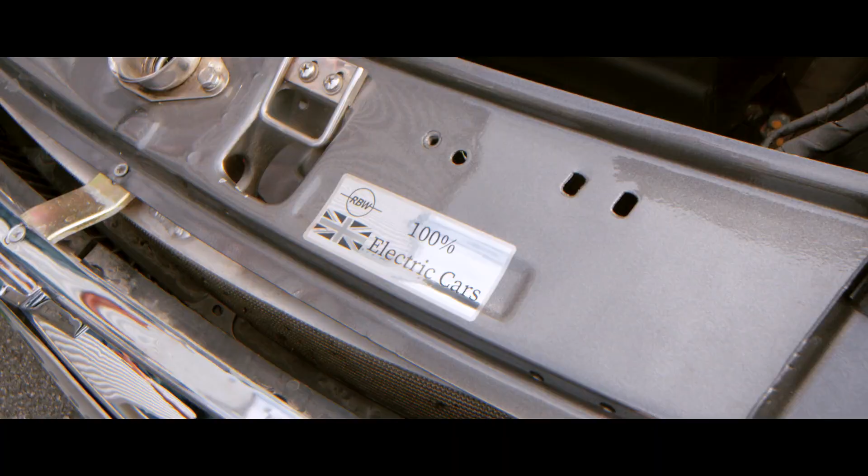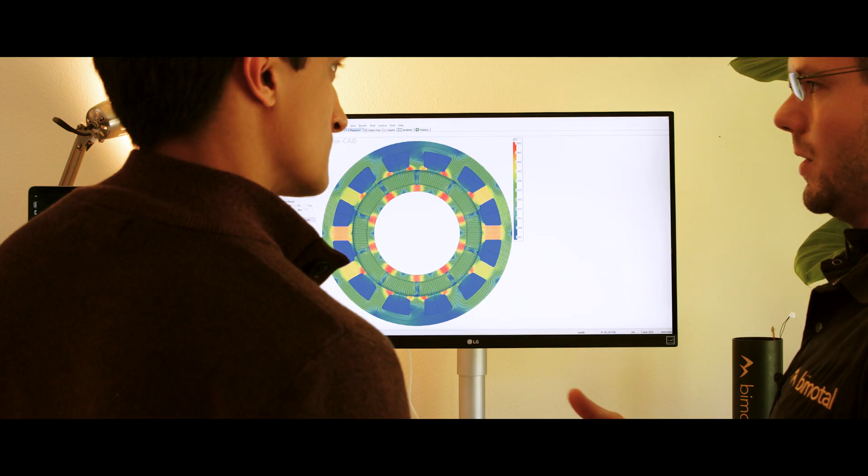Today, we're going to go beyond electric cars and public transportation and see some of the groundbreaking new technologies you may not have heard of. We'll visit the world's brightest scientists, engineers, and inventors and see their bold new ideas for technologies that help rescue the planet. And we'll learn how they're using cutting-edge simulation software, like the kind developed by Ansys, to speed up development, reduce costs, and make sure we get these vital transportation solutions as fast and efficiently as possible.

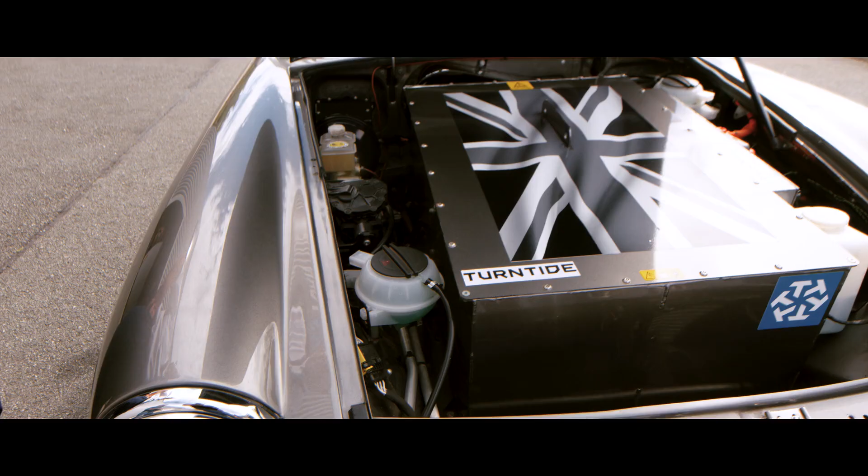When it comes to electric cars, we've come a long way, literally miles. But the fact is, transportation remains responsible for nearly a quarter of global emissions, and personal vehicles are just one contributing factor.

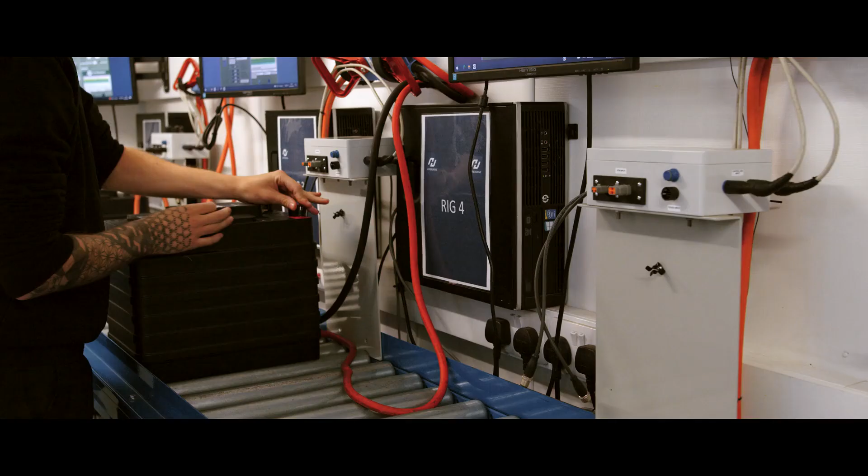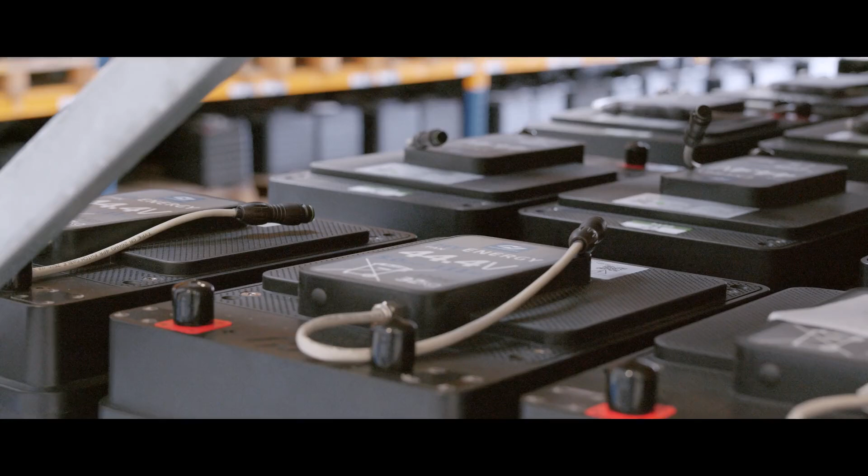Heavy machinery and rail, for example, still largely rely on internal combustion engines to operate. Turntide is looking to change that. With a diversified portfolio of solutions in electrification, energy storage, and electronics, Turntide seeks to expand the decarbonization of transportation beyond the humble car and accelerate the world's transition from fossil fuels.

Batteries are living things, so when we look inside this and there's a cell, it's a chemistry. Chris Pennison has developed a reputation for delivering high-performance manufacturing. His mastery over processes has put Turntide in a position to deliver industry-leading electrification solutions that are both environmentally and economically sound.

So I think when most people think about electric vehicles, their first thought might be a Tesla or a Nissan Leaf—a car, right? Yeah. But you're not doing that, are you? You're looking more broadly. Could you tell me about that? Absolutely. What we're really interested in is what we call the long tail of electrification—everything else that we know will need to be electrified, from construction vehicles, agriculture, autonomous guided vehicles, marine, aerospace—everywhere that needs to be electrified but maybe isn't as advanced on the journey as the OEMs and the passenger car market, which is really our target.

Okay, so say I was a customer and I had, I don't know, a construction vehicle. What would be the process of me talking to you and saying, hey, I want this electrified? What would you have to consider, and what are the challenges involved in that? What we have to understand is what the capacity and the working requirements that we can offer you are.

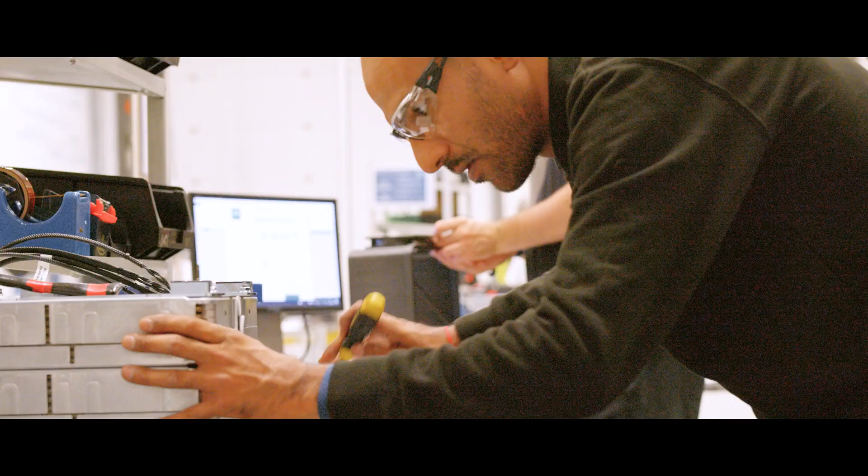We can then do some of the design work, to see if actually what we think will work. We then step that through with the team we've got here to take the simulation data—we'll model it, then we'll hard model it. So it goes all the way through to when it ends up like this and goes to the customer, it's gone through various iterations to get to the customer, to give you, if you're the customer, that confidence that it's going to actually do what it says it will do on the tin. This is a bespoke designed cooling radiator.

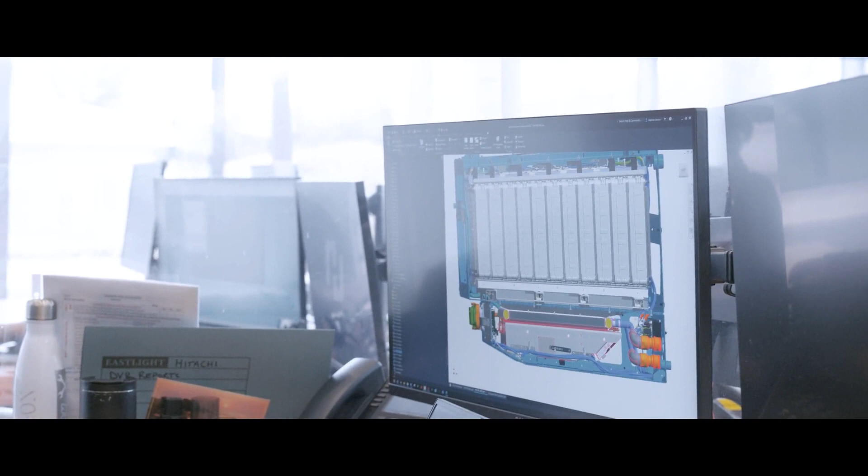What sort of temperature range did you have to keep them within? We're trying to target 25 degrees Celsius, purely just to make sure that the cells don't degrade.

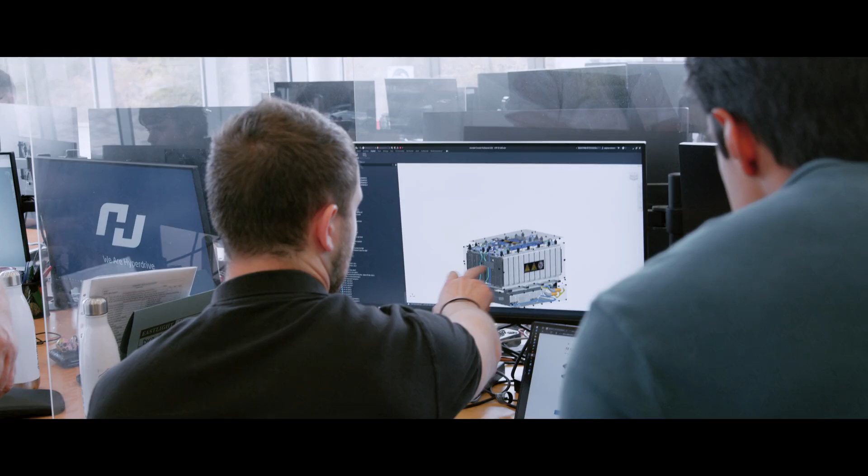Basically what we've got inside here, these are the battery cells. We've got 22 of them that fit in basically 2 stacks. We've got our own PCB design, which is the battery management system.

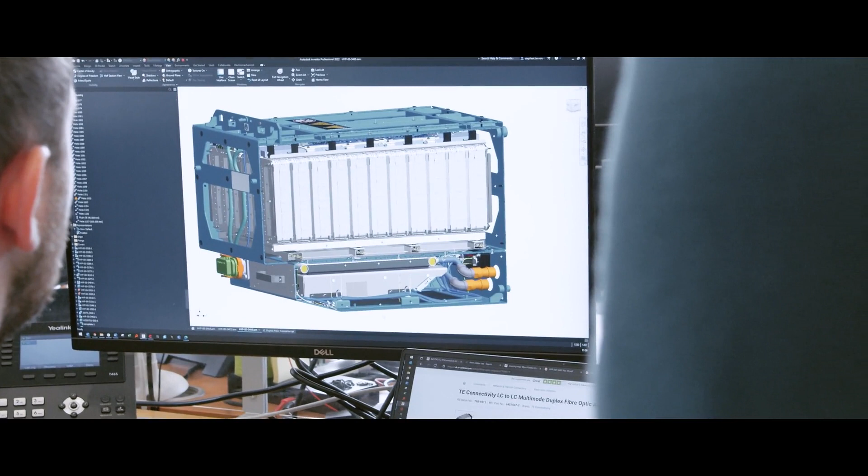Rather than building everything, we run the simulation to make sure we can still get everything we're trying to do in that same envelope with the weight we're allowed, before we actually start to physically cut steel to a point. And what you've got here is the battery pack.

If you remember what he was showing you, the modules - so this is in effect the fuel tank. This is the cell modules, the cooling system at the bottom here, and then what you've got on the top is the brain and the battery management system.

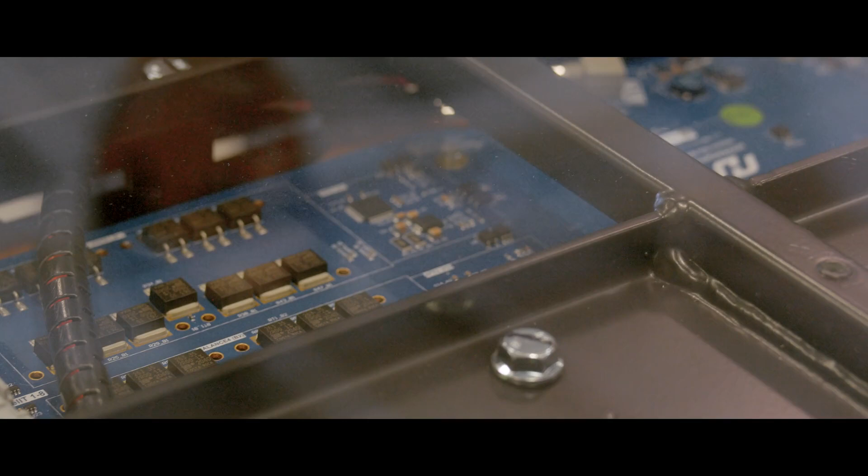This is the output of, in effect, 2 years of work to get to this stage. It's already been simulated for life. You asked me about safety - we've already done fire testing on these to make sure it reaches all of the correct accreditation.

We're now at a point where these are in test vehicles, because now you've got to build miles up, and there's a year of testing on that before you even get to the production bit.

This is the last part. If you think about it, we've had raw material come in, we've built it, we've followed the process, we've charged, we've discharged, we know it's all good. Then all the customers need to have, depending on who they are, their language put on their software, and that's what we do here.

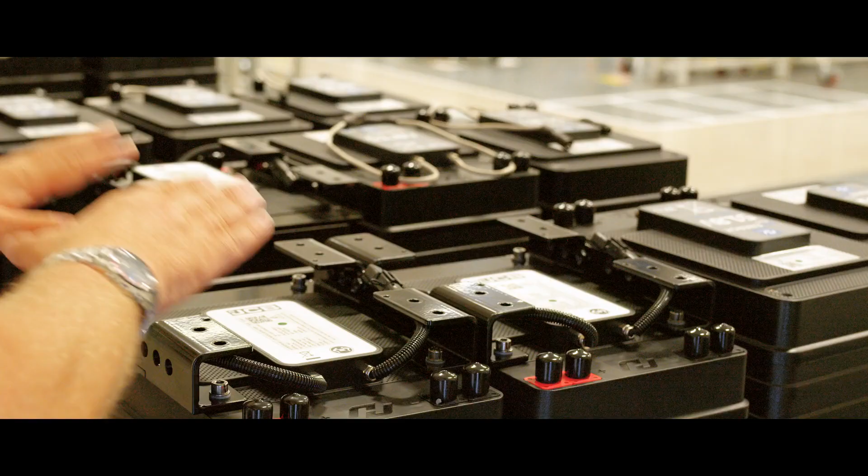So this then really brings them to life, this really allows customers to do - to your question, what will I do with this when you send this to me? Well, once I've put the language on, once we've done all of our checks, you will be able to install it into your vehicle or whatever process you're using to allow it to work.

So this is where it all ends up. After everything we've seen, this is the niche end of the market - batteries that we've developed then go into this vehicle.

Awesome, so what happens, seeing as we're at the end, what happens to those batteries once you've used them? Okay, so we're not quite at the end. So we get a life out of the batteries that are in this vehicle or our other vehicles, and we call it end of first life.

So then we take the batteries back. We then have a secondary use for them, stationary energy storage, or we move them to another application. We put new batteries in here, the vehicle's as it was, and it'll run as normal, and then we continue to use the batteries. So yeah, show me what this car does.

Okay, so we're ready to go? Absolutely. It's so quiet, this is quiet. Yeah, and now we're ready to go. It is incredibly quiet actually. I was expecting it to be. I'm going to give you a little squirt along here now. Oh ready? Yes, let's do it. Let's go.

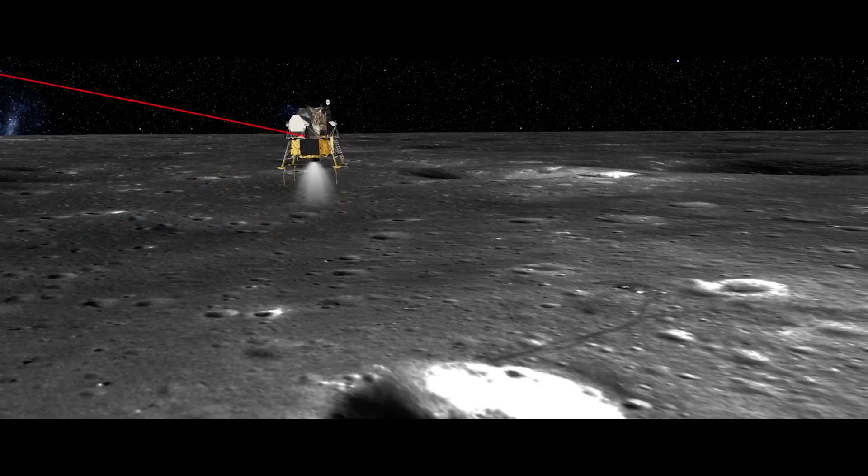In 1903, Wilbur and Orville Wright changed the world forever with a 12-second powered flight at Kitty Hawk. Just 66 years later, a man walked on the moon. Looking back at that history, our pursuit of aviation has been nothing short of incredible. But now we know that it comes with a cost. The fact is, air travel alone pumps over 1 billion tons of greenhouse gases into the atmosphere every single year. And as the world heats up in response, we need a solution now more than ever. So how do we decarbonize our aircraft?

MagniX is exploring how electrification can be applied to aviation, presenting a proven capacity to power a diverse range of aircraft and driving the world's transition towards electric flight.

An author and inventor with 5 patents to her name, Sarah Rogier has worked extensively on the development of electrical machine technologies for aircraft. Here at MagniX, she leads electric propulsion system development, focusing on the design and delivery of electric power units for carbon-free flight.

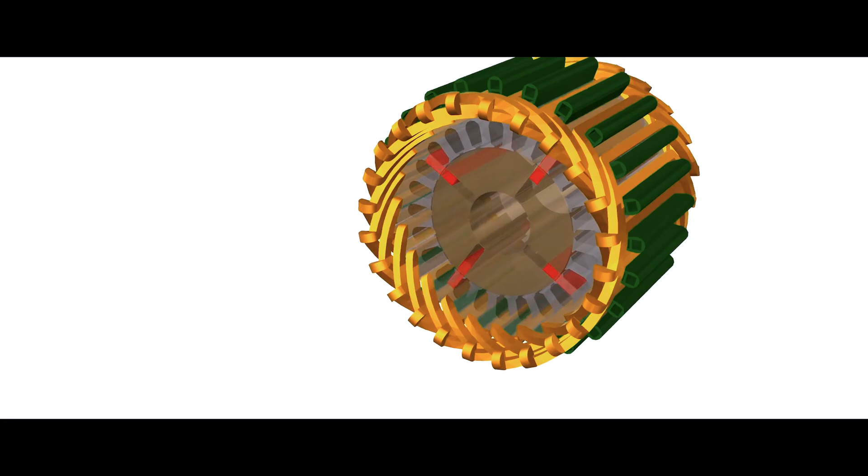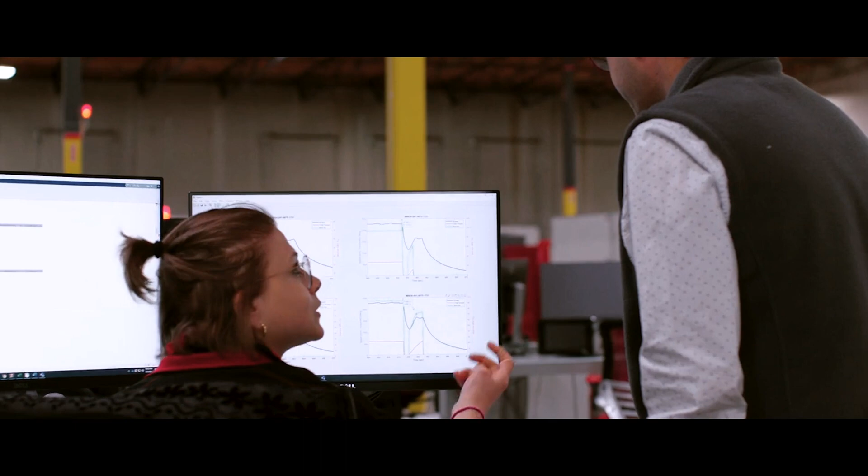For example, when we design the motor and the entire EPU, we have to start from finite element simulation to predict the electromagnetic behavior of the motor, then move to thermal simulation to see how we can extract the heat from the losses produced by the motor. Then we integrate the rest, for example the control, which is part of the inverter behavior. We simulate everything at system level.

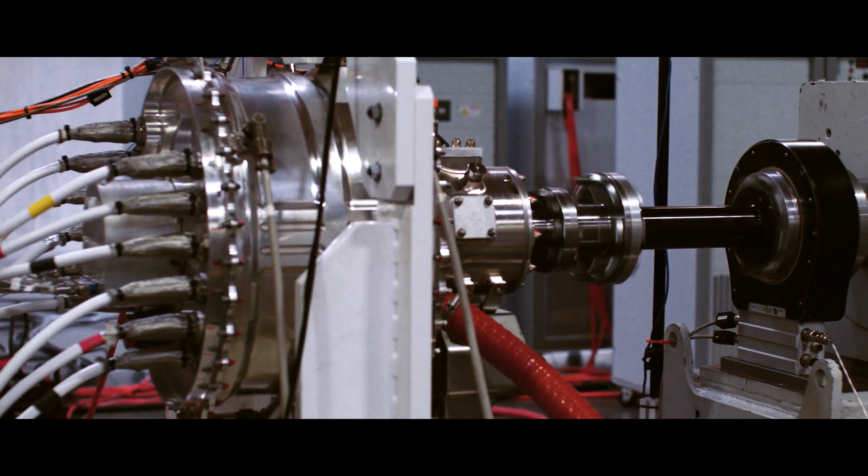Then we move to hardware in the loop, where we simulate part of the system and the rest is hardware. Finally, we move to the complete integration of the EPU with the final propeller configuration we're going to have on the aircraft. There's no more calculation by hand you can do - we need finite element simulation even for the mechanical part, to simulate the stress around the motor and the mounting parts. Everything is basically done by simulation. We cannot fail this.

Obviously this is having a massive impact on emission reductions, or has the potential to. Are there any benefits beyond the environmental? Mainly costs - a ticket, instead of costing $500, will cost an estimated $50. And also noise: you can have aircraft close to your hometown without the huge noise you get from a fuel engine. The electric airplane will be much quieter than that.

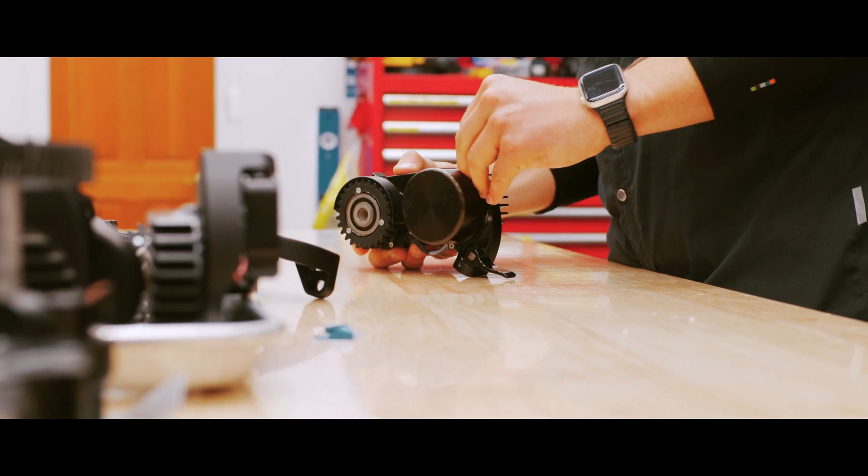Reliable and eco-friendly, the bicycle has been around for quite some time. But what if you've suffered an injury, live next to a really steep hill, or have a longer commute? Over the past decade, we've seen these once impossible uphill climbs conquered by the e-bike - a bicycle supported by an electric powertrain. But how do we make this tech lightweight, powerful, versatile, and accessible to everyone? That's just what Bimotal is doing.

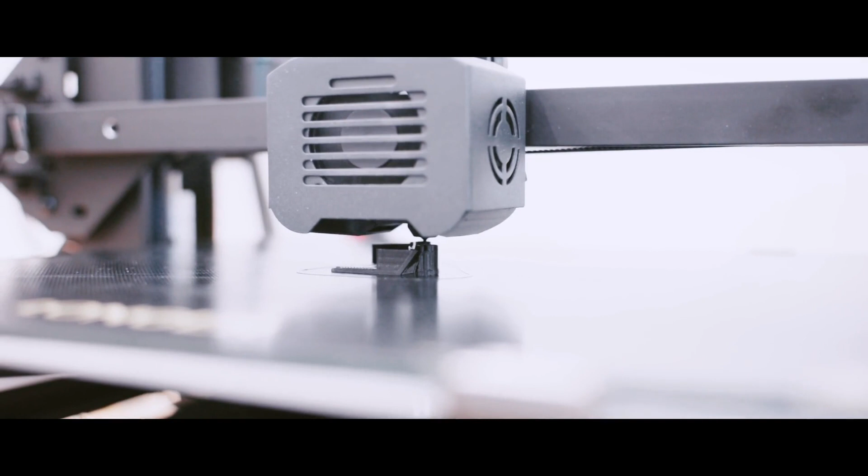Basically the genesis for this idea was actually an accident. I had a ski injury, and that led to me not being able to ride the bike trails I loved riding. Growing up in the tech-rich culture of Silicon Valley, it's hardly surprising that tinkering with electronic devices became an early hobby for Toby Rico. Working on EVs by day, Toby Rico spent his evenings and weekends researching to find the most efficient combination of power, weight, and versatility in an electric assist system for bicycles.

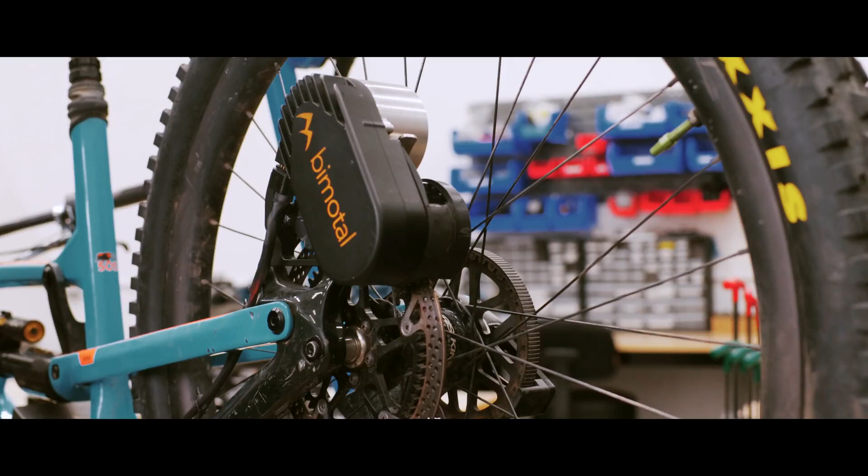The result of hours of research and entrepreneurial spirit is right here: Bimotal. I started staring at my bike literally hours every night after work, and eventually the idea came to me. I was like, wow, you can put a lot of torque through a disc brake. I wonder if you can change the direction and get some propulsion that way.

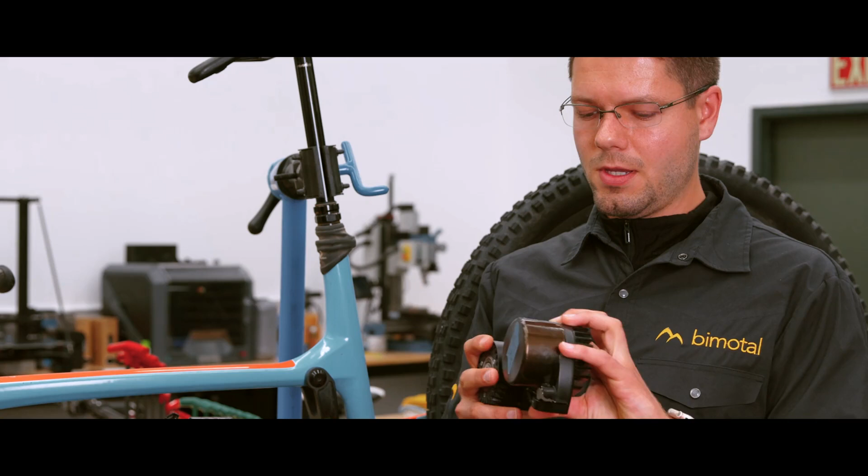You're effectively, as I understand it, creating a device that you can attach to almost any bike and it becomes an electric bike. So how does it work? This is the Bimotal Elevate, and basically the way it works is we have a motor here, and then there's a multi-stage gearbox in here, and that lets us reduce the torque on the motor so we can make the whole thing smaller.

And then we have a proprietary gear here, and this drives torque through the bike's disc brake. And so in order to make a bike electric, we have to swap the disc, add a couple bolt-on mounts over the brake caliper, but basically any brake mount can handle a lot of torque, so it's a great way to make most bikes electric, without any real modifications.

Can I have a look? Absolutely. Yeah, my first impressions are it's much smaller than I was thinking. So is this attached to every bike, or what are the limitations? Right now we're launching it and targeting more mountain bikes because there's a much higher rate of compatibility there. But eventually we're trying to make it compatible with pretty much any bike that has a disc brake, and the general trend of the market is actually moving towards disc brakes.

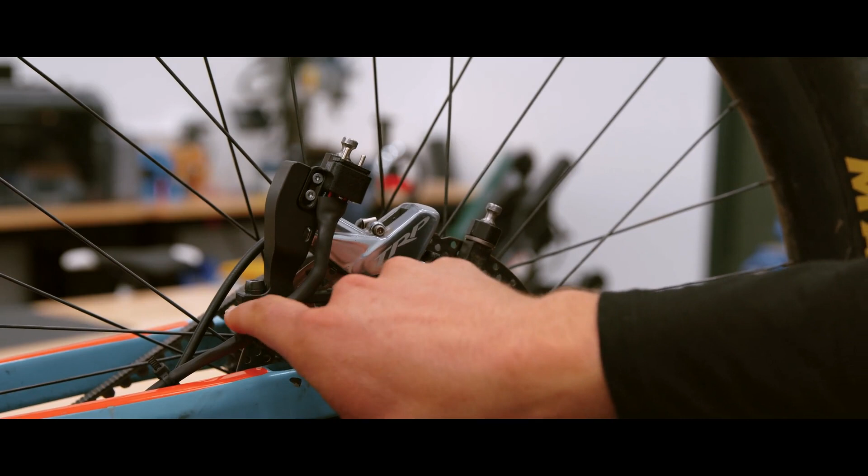So this is a stock brake caliper, this is a sort of stock bike position. This one aluminum piece is designed by Bimotal, and then these quick connects and connector also designed by Bimotal. It's latching onto these two studs here, and then this is the electrical contact custom connector we also designed, and that lets you take it on and off rapidly.

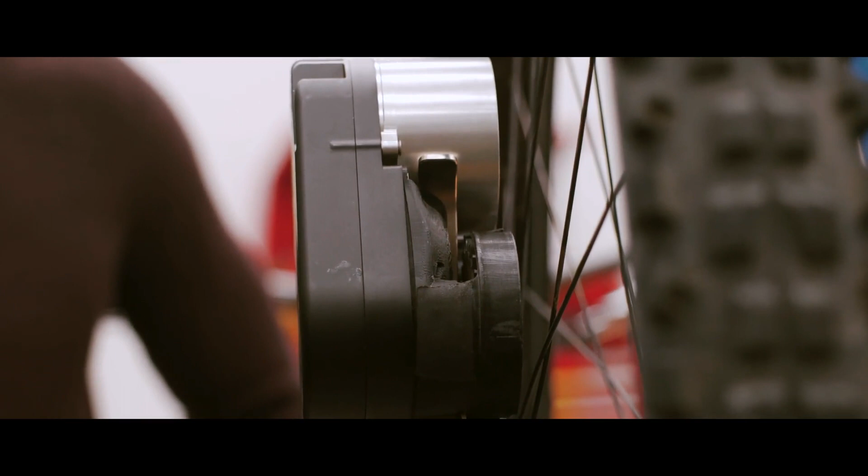That was very quick. So how much power does it generate? The Elevate system can actually do even more than 750 watts. What a lot of people don't know is they think these systems are power limited, but it's actually torque that's the challenge. So providing high torque is something that's difficult to do in a small package.

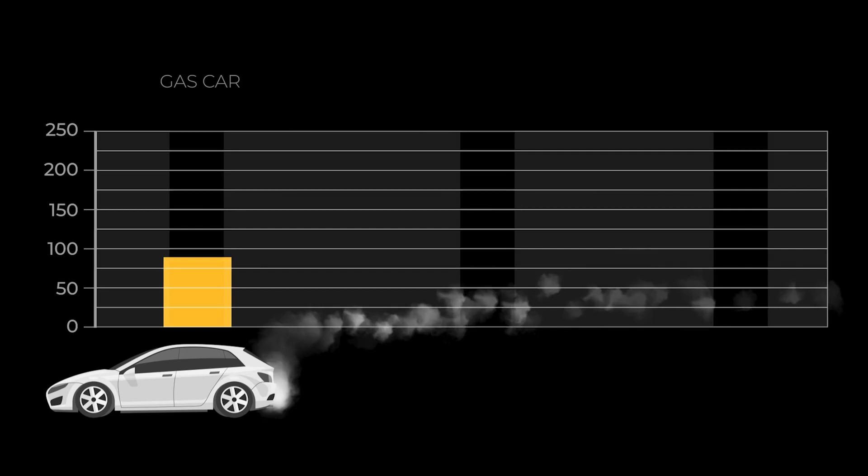So let's talk about the bigger picture here, because obviously driving cars is still kind of the go-to form of transportation, and by and large those cars are producing a lot of CO2. Clearly, if we cycled more, that's got to be part of the solution. If you look at how much CO2 is generated, road transportation is still the single biggest block. The gas car is about 250 grams of CO2 per mile. An electric car is about 50 grams of CO2 per mile. So that's a 5 times reduction.

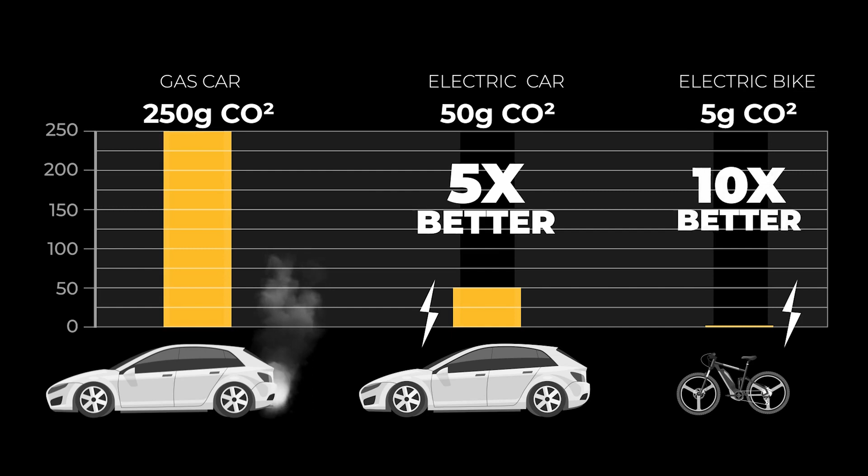You get down to an e-bike, it's about 5 grams, and that's another 10x better than an electric car. Step one is making bikes more fun. So the Elevate system, you get on this thing, it's just a blast. Improving the metrics of the bike system, the range, the weight, reducing cost by making it so you don't have to get a whole new bike, you can add this system. All these things will kind of add up and make bikes a little more approachable.

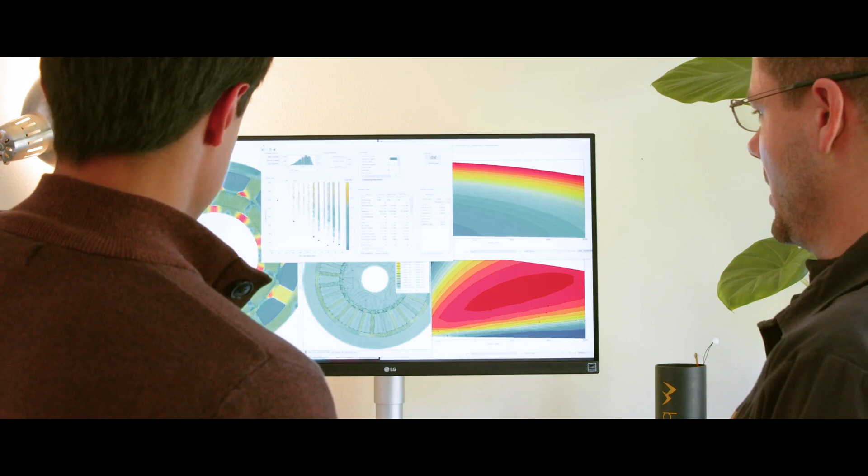So we have this cloud of motors. We do magnetic simulations, we do thermal simulations, we look at noise, we look at any other limits of material selection, how we can wind the motor. So we put that all together, come up with a few good motor candidates.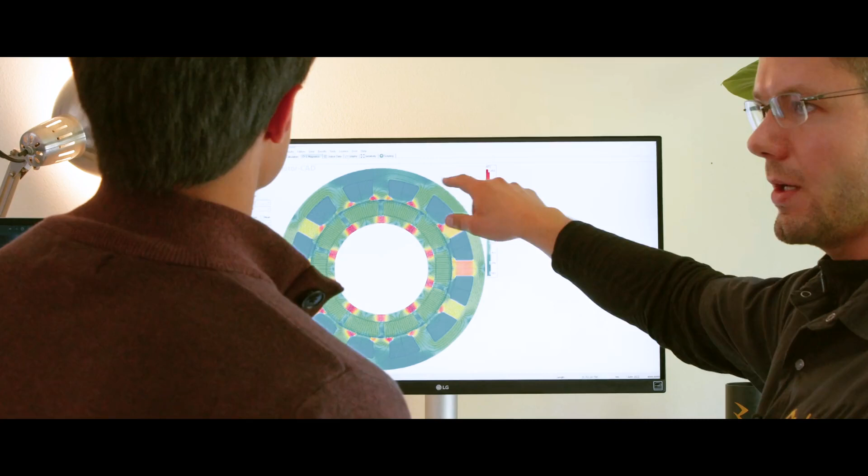And then the next step, which is even more exciting, is we get to take this into a real heavy-duty simulation tool called Ansys MotorCAD, and basically map flux lines of how the magnetics work on the motor. We can check the thermals of the motor. We can also check and get an early estimate of how loud the motor might be.

A bottle-sized battery pack and ultra-lightweight motor allows even the most casual cyclist to generate over 750 watts of power, enough to run your microwave. But how does this technology handle a real challenge, like a steep incline, a rather common sight here in Northern California? Let's find out.

we will not slow down.

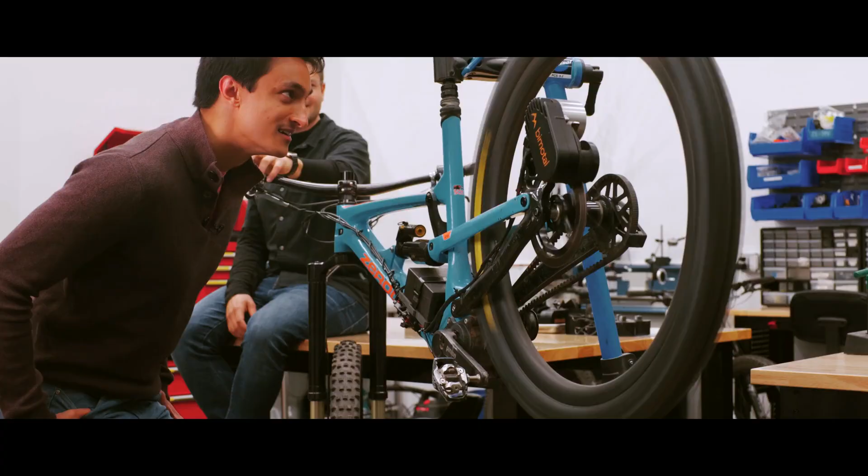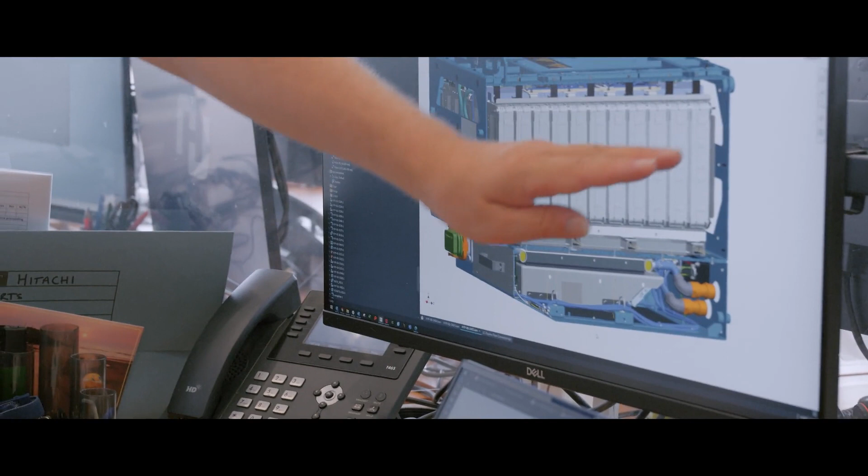As we continue to advance our capability to travel greater distances and at greater speed, it is crucial that we do so in ecologically friendly, carbon-neutral ways. Which means our brightest scientists and boldest innovators must be armed with the advanced tools and technology necessary to expand what's possible, predict the future, turn wildest dreams into reality, and rescue our planet.